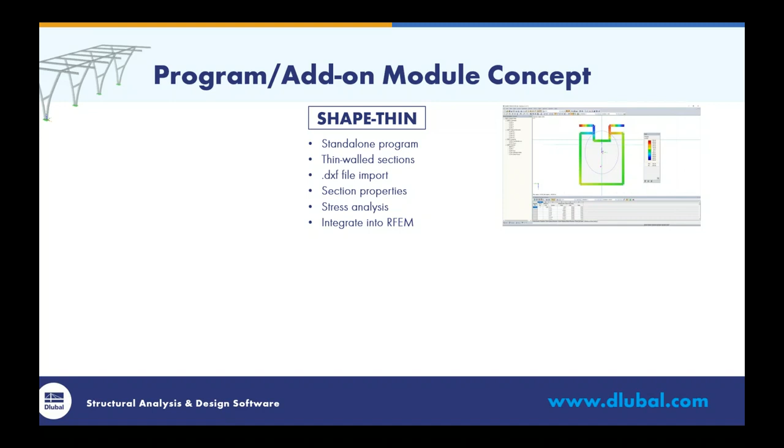Or we can import in a DXF file, which is what we'll be utilizing today. These section properties will be calculated. You also have the ability to run a basic stress analysis directly within the program, which we won't be taking advantage of today, but it is an opportunity to do so. Then we take these cross sections along with their properties and integrate them into our FEA program, RFEM.

So RFEM, again, is a separate program, and this is where we can model our structure entirely. We also can integrate with BIM software such as Revit, Tekla, AutoCAD. We can fully load the structure. We can set up our load combinations, again, according to the ASCE 7, as well as many other international standards, and eventually we get a full analysis.

Now, the analysis will provide us with design internal forces, deflections, support reactions, and we can take this analysis information into our own tools to do the design. If we'd like to do design within RFEM, this is where we'd want to take advantage of the design add-on modules. In particular, today we'll be looking at RF-ALUMINIUM ADM.

So this is nothing more than just a dialog box that is within RFEM that allows us to do member design for aluminum per the ADM 2010, the 2015, and we have both ASD and LRFD. This does include both ultimate and serviceability design, so we can check deflections as well. This also includes custom extruded sections, which we'll see today, where we take this section from Shape Thin into RFEM and we can design it per the ADM.

Now, this is for unwelded member design. Hopefully, at some point in the future, we hope to add the welded checks, but for now, keep in mind that it is only for unwelded members.

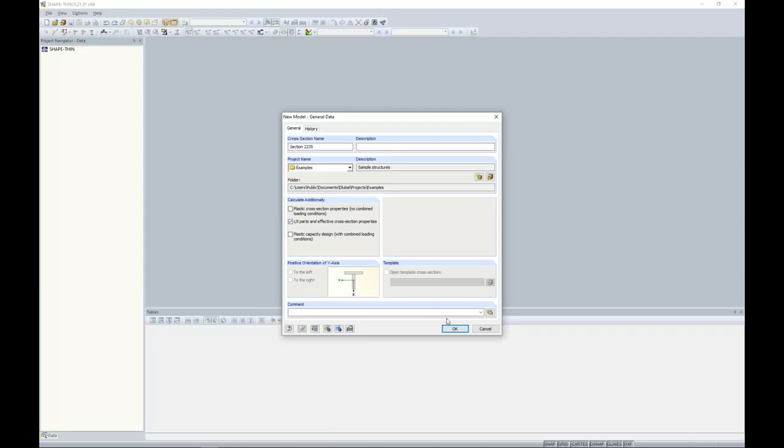Now this is the width to thickness ratios of our different elements that comprise this cross-section. This includes flanges, webs, any of the lips or extruded sections. Why this is so incredibly powerful is that when we take this information of these width to thickness ratios into RFEM and eventually into the aluminum design module, we can actually check all of them for local buckling. This is not something that maybe some other programs can do, but it requires a little bit more additional work within ShapeThin itself to define this section, and we'll go ahead and see that now.

So when I click import, we are brought into our graphical view here where we can go ahead and place the DXF background layer. There are a few options here for how we exactly want to place this DXF file, and I'm going to choose this one where I can further edit it. I select this center node, snap here to my origin point, right click to exit out of this dialog box, and now you can see this background layer here.

Now it's not so simple that we can just simply mesh based on this import here to calculate the cross-section properties. We somewhat need to trace over this background layer again, to determine the width to thickness ratios for eventually local buckling. But we do have some powerful tools that allow us to actually do that fairly easily.

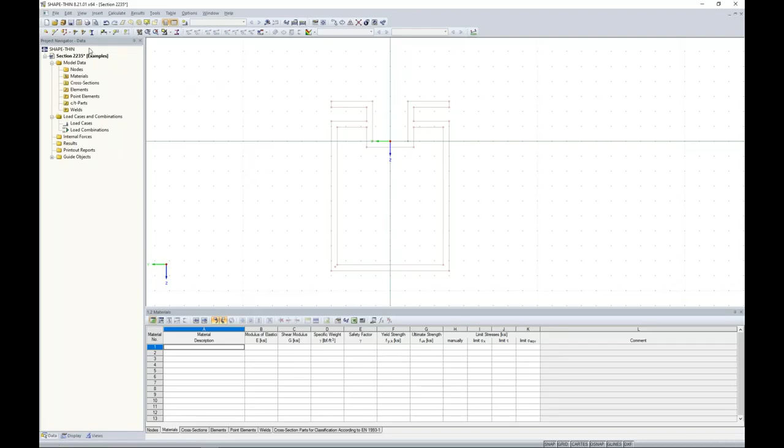So under edit, we have set elements with DXF template. The first option here is to set the center lines. I zoom in and select two lines, and you'll notice that the program automatically places a center line between the two selection lines. I'm going to focus for the most part on the left side of the structure here, because once I define my elements on the left side, I can mirror it to the right side.

So in addition to setting the center lines, we have this fourth option here to set the elements. We can manually draw in our elements with a new line, but we want to take advantage of these tools that just make our life a little bit easier within ShapeThin.

So I want to set my material right now. I can open up my material database, and you'll see over on the left we have our filters. We can filter to metal, to aluminum, to the ASTM, and eventually the ADM 2015. We have quite the long list here of all the aluminum materials directly from the standard. If I want to search by a particular material, for example, I can type in 6061 and see all of the applicable materials here, where I will choose 6061 T6 for pipes and tubes.

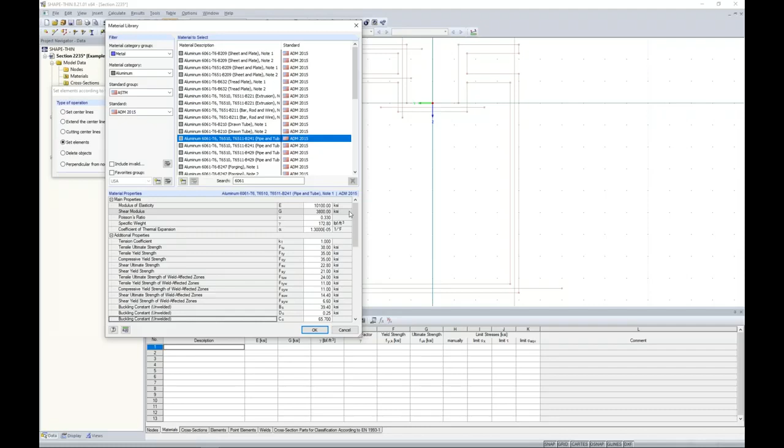All of my material properties are defined here. Quite honestly, the material definition is not so important within ShapeThin if you're not doing a general stress analysis, which we're not today. Eventually, once we get into RFEM, we're actually going to have to redefine the material anyway, but this is just a good introduction of where you can find the materials within the database.

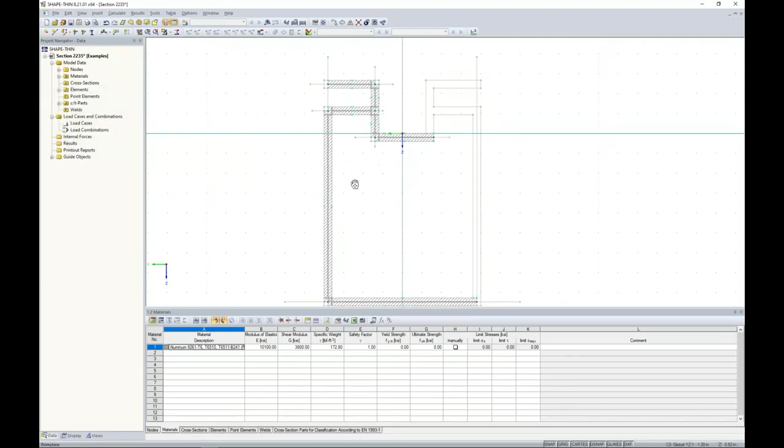So now what I can do is just simply click on these center lines, and the program detects where the outside boundary lines are for the thickness of these elements. Once I have completed, for the most part, the left side of the structure, you'll notice I want to actually drag this one element to the end. No problem, I can just drag and drop it, and it will snap right to that end point.

I can highlight all of my elements here and use my mirror tool. The mirror tool is exactly like what we would find in AutoCAD, for example, where we can create a copy. We can mirror about the global z-axis and the origin point. I click OK, and now the program has created all of the elements on the right-hand side. It does create a couple little small segments here that I can just simply delete with my keyboard.

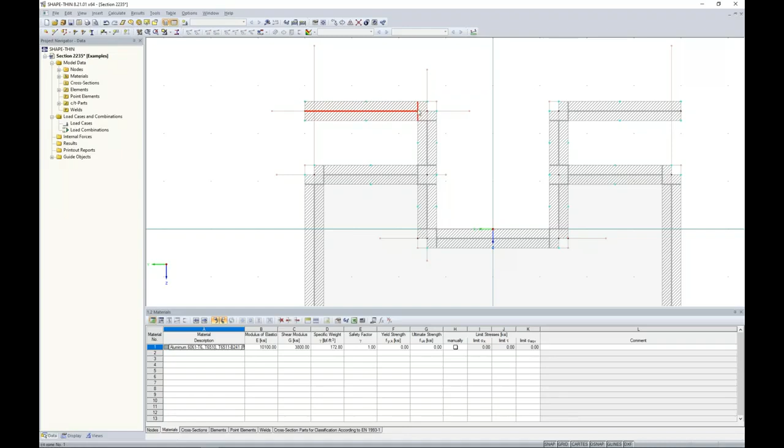Now you'll see these symbols at each element, and this is the width to thickness symbols, those C over T parts. So this is what's recognizing width to thickness, but even more so, you'll notice that at these closed ends we have what's called, looks like a T symbol, but at the open ends we don't have that same symbol. This again is important for aluminum design to tell the program how the edges are supported. Over on the right hand side we can see that it's supported, but over on the left hand side it's not supported. Again, important for local buckling.

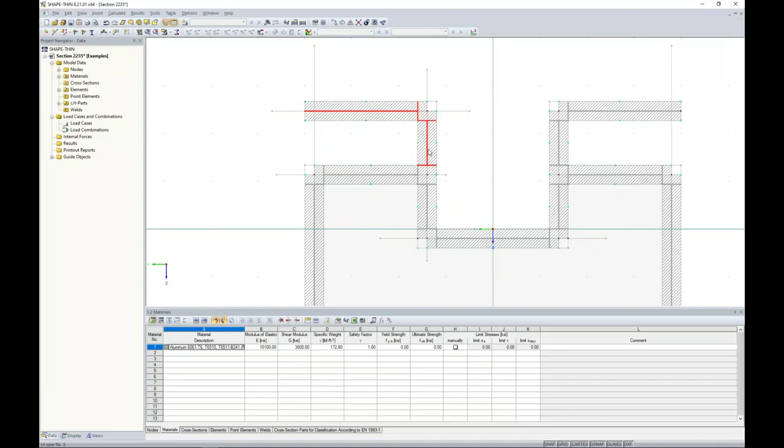When we look at one of these other elements that's supported on both sides, we see that T-type symbol on both sides.

So that's all we need to do, and now we're ready to run our calculation to determine the cross-section properties. When I go to run the calculation, I immediately get an error saying material number 1 Fy is not positive.

This is the yield strength for my aluminum, and I can look down here to my table where the program jumps to Fy, which is set to 0. The reason for that is aluminum has different yield strengths depending on tension, compression, or shear. So all we need to do is set some type of placeholder here, Fy equal to 30 is perfectly fine. That's why the program populated 0 there.

So we can rerun our calculation, and now we're presented with our results. Most importantly, if we look at table 4.1 for section properties, the program has automatically calculated all of the cross-section properties for us, including area, moment of inertia, warping, and things like that. So everything has been done automatically according to my calculation.

Now it's very important that I save these results. You have to save the results with the cross-section properties, because in order to integrate in RFEM we need to know those, and that only occurs with the saved results. We'll get a message in RFEM if you try to integrate a shape thin section without running a calculation first. So that's all that's required from the shape thin side.

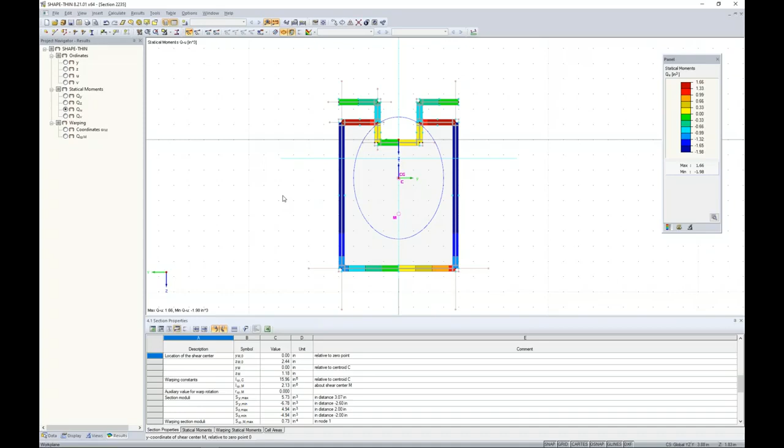So now what we can do is jump to RFEM. You'll notice RFEM has a very similar interface to shape thin. So what's great is that if you know RFEM pretty well, then shape thin should come pretty naturally.

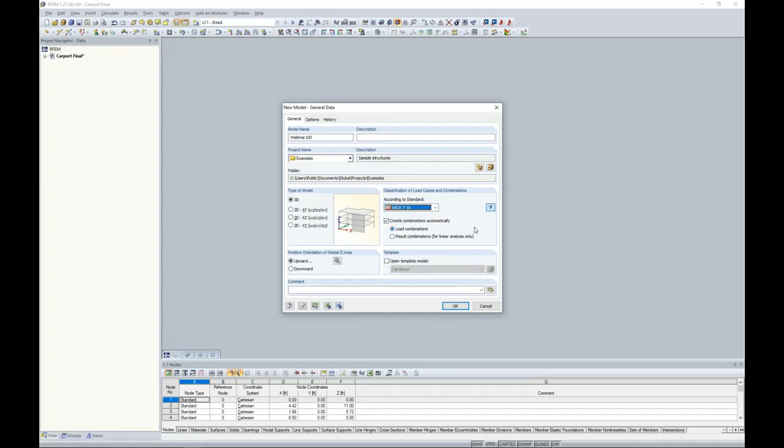We want to give this one a name, so we'll call this Webinar 100. The type of model is 3D. We can generate the load combinations automatically according to ASCE 7 2016. In this drop-down box you can see we have many other international standards as well, including the NBC 2015. You can always uncheck this checkbox, which allows us to manually create the load combinations instead, but today we want to take advantage of the load combination generator, so we click OK and we're brought into our main program RFEM.

So to give a quick overview for those of you not familiar with RFEM, we have our graphic window right here in the center, and we'll begin to model our structure and see that built up visually. Down at the bottom is our table, and we can always import and export data to and from Microsoft Excel, including our results that will eventually be presented in table format. Over on the left is our project navigator. As we generate this model, all of my input data, including my loads, load cases, and combinations, will be available within the project navigator so I can make quick changes to entire cross sections or material groups.

If we scroll down a bit further, this is our long list of add-on modules. This again is why we have the concept of only pay for what you use, because quite likely you won't utilize most of these add-on modules depending on the materials or international standards you use for your projects. And finally we have our tools up at the top, which we'll be utilizing today.

That brings us to the creation of our first column, where we'll go up to our quick tool to draw a new member. When we choose this option, we want to select the member type beam, and we can open up our cross-section library. For aluminum sections we'll typically work with the parametric thin-walled sections, or we can take advantage of the ADM sections directly from the standard itself.

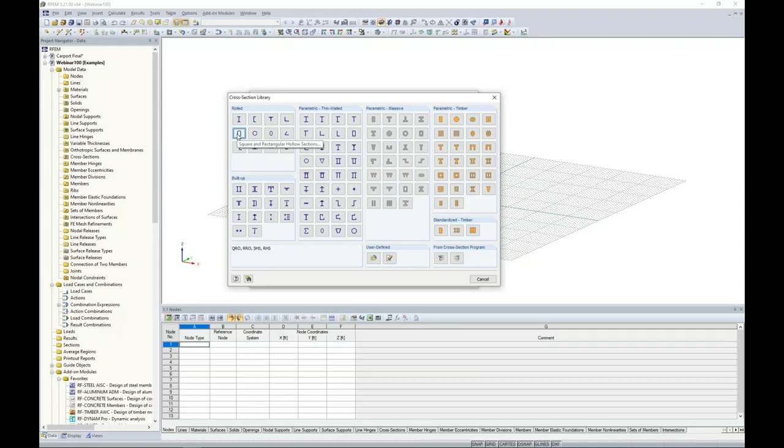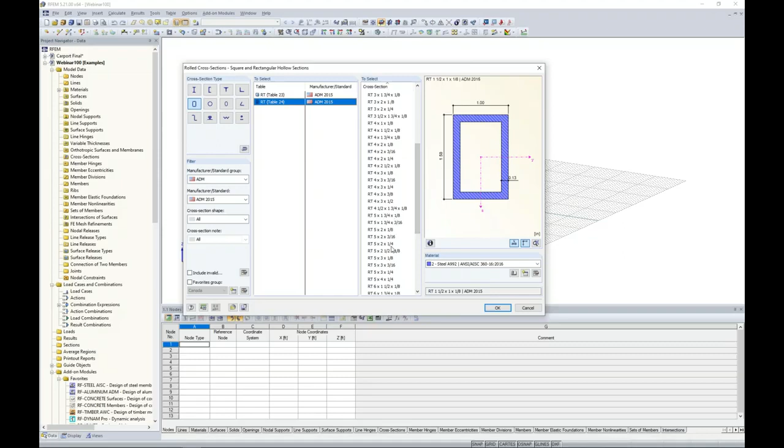So with that, we'll choose a hollow square section for today. I click on my HSS sections, filter over here to the ADM, and we'll see an additional filter to the ADM 2015. For my first column, I want to select a 5 by 2 by 1/4, and I can just choose it right here in my drop-down box.

Now the material by default when we first open up the program is 4,000 psi concrete or steel A992. So what we need to do is choose a new aluminum material from our database.

Well, that's quite easy by launching our material database, and this should look very familiar—it's almost exactly like what we saw within Shape Thin. We can use our filters on the left to filter to metal, aluminum, ASTM, and 2015. I can type in 6061 and select 6061 T6 from my list here for pipes and tubes. All of my material properties are presented in this table. I click OK, I click OK.

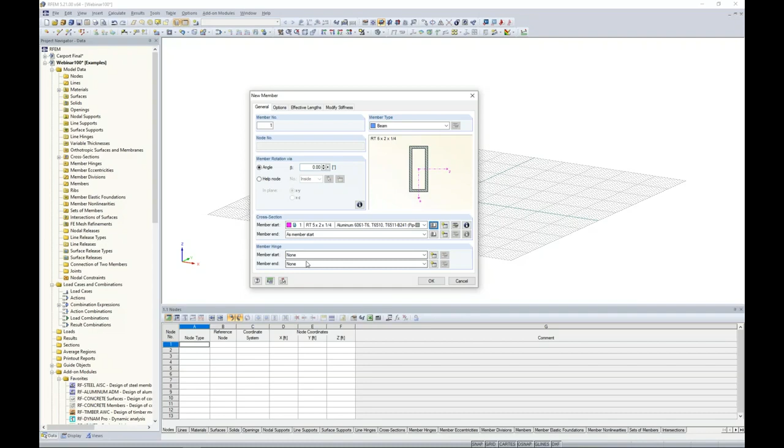Just to preface this, our model today will be fully fixed, but if you did want to set a pinned member end, you would do so within the same dialog box by creating a new member hinge. Leaving everything fully fixed is what the type none means, so we'll go with that for now.

So we want to begin by drawing our column, but I want to change around my drawing grid here to the vertical direction. I can do so by changing my work plane into the XZ plane.

I can scroll down, and instead of a straight line, I actually want to create a curved column, and I can do so by selecting an arc here. So I snap to the origin at 0, 0, 0, and then my second point can either be defined on my work plane, but in my particular case I don't have exactly 1 foot increments for my second point, which is the default for my drawing grid. So what I can do is just type in the coordinate points directly at 4.42, 0, and 11.

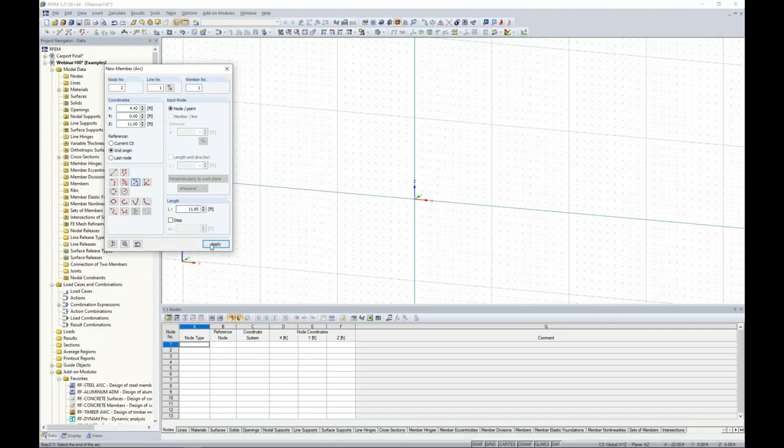Now you want to make sure not to drag your mouse outside this dialog box because everything resets to the current position of your mouse on the work plane. So we'll retype that in at 4.42, 0, and 11. We scroll down here to apply. Now you can either define the radius by clicking on the work plane, or I can just type in 30 feet on my keyboard and hit enter. And so now we should see the curved aluminum column shown here.

In a similar sense, we want to go back and draw a new member. I want to take advantage of the exact same cross section and the same material. I click OK, and we want to create another curved member.

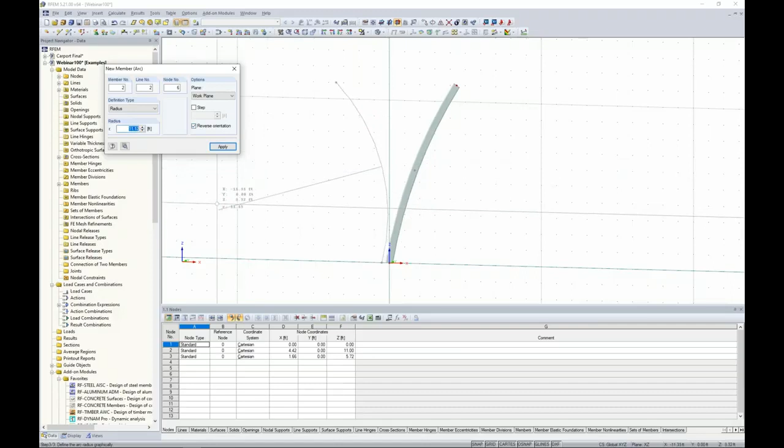So we'll choose the arc option. Now my first point doesn't fall at these 1 foot increments, so I can specify negative 0.5, 0, and 0. I click apply. Now my second point is going to be negative 3.5, 0, and 11, and I hit apply. Now you'll notice my radius is curving the wrong way—that's no problem, all I need to do is check the checkbox for reverse orientation. I'll type in 40 feet on my keyboard and hit enter. And so now we have our second curved aluminum column here.

The next thing to do is apply some type of intermediate brace between these two columns, and I want to do so at some nodes along the member length that I need to create. So I can right click on my right column and divide the member by a certain distance.

With this distance, I have the opportunity to choose the projected direction Z. So what I want to do is add a node that is 5.5 feet in the vertical direction starting at the base of the column. You can see here which side is the member start and the member end based on this black arrow. I type in 5.5 feet for my member start. I click OK, and now I have divided this member, which has created an intermediate node there.

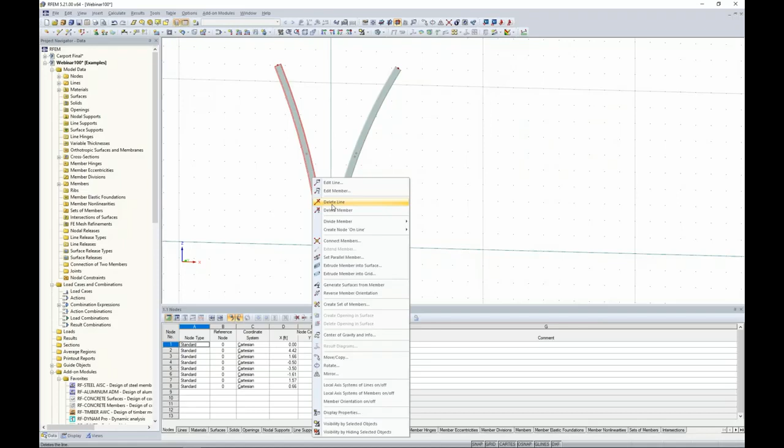I'm going to do the same thing with the left column. I'm going to right click and divide the member by a certain distance. Again we're going to choose the projected direction, but this time it's going to be 4 feet from the member end. You'll notice we have the reverse orientation for this column, which is no problem at all. So now we have split apart this member as well.

I want to go back to drawing a new single member, once again taking advantage of the exact same cross section and the same material. I click OK, but this time instead of the member being a curved element, it will be straight, where I can snap to those new nodes I just created to add a small intermediate brace here.

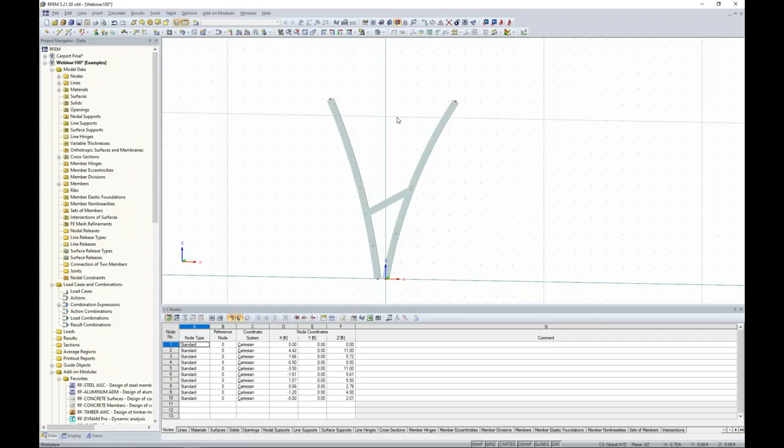Moving on to the top of our carport canopy structure, we want to import that SHAPE-THIN section. So I'll go to draw a new member, which we are familiar with, and open up my cross-section database. You'll notice that once this populates over on the right-hand side in the lower corner, we can import the cross-section from SHAPE-THIN.

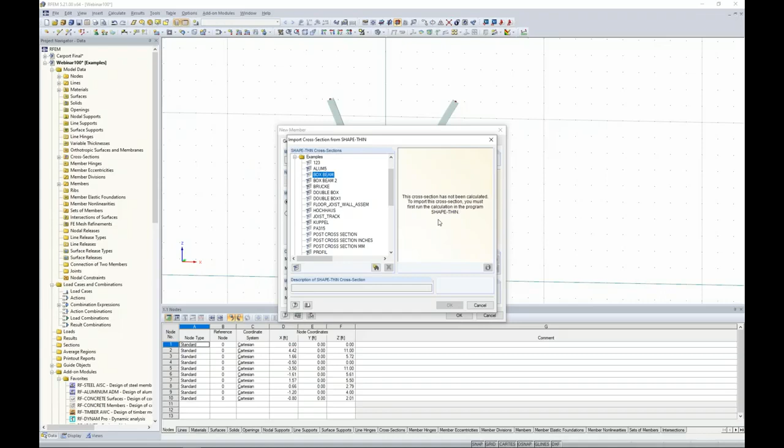We'll browse to the file location of where I saved my custom cross-section so we can see it here. By the way, if you were trying to import a cross-section where the results weren't saved, you'd see a warning or note like this, telling you the cross-section hasn't been calculated, and you'd need to go back to SHAPE-THIN and do so. This is why the results need to be saved with the SHAPE-THIN file.

We can see here section 2 that we have just created, and we want to import that in. Notice it defaulted to the first material, concrete 4000 PSI, available in our model. So we actually want to edit the cross section, and instead of concrete, choose the aluminum material already defined in the model. I choose aluminum 6061, and everything looks okay with the material and cross-section set now.

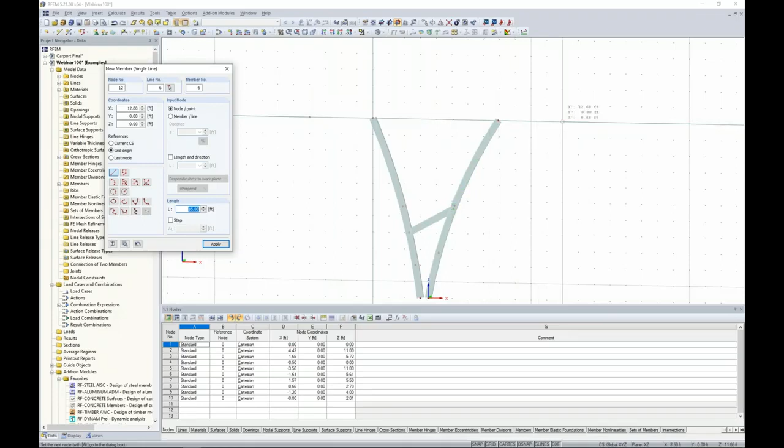I'd like to move my drawing grid so the origin is now placed at the top of the left column. I can do so by selecting this button to set the origin of the grid work plane, and move to the top of the left column. I'm still within the dialog box to draw my new member, so I'll choose a point about 4 feet from the top of the left column and span about 3 feet to the column on the right.

What's also powerful, if I turn off my drawing grid and zoom in, is that we bring in the exact rendered view of this custom cross section. So it's nice to see the orientation of the member and how it's framing into these columns we have just created.

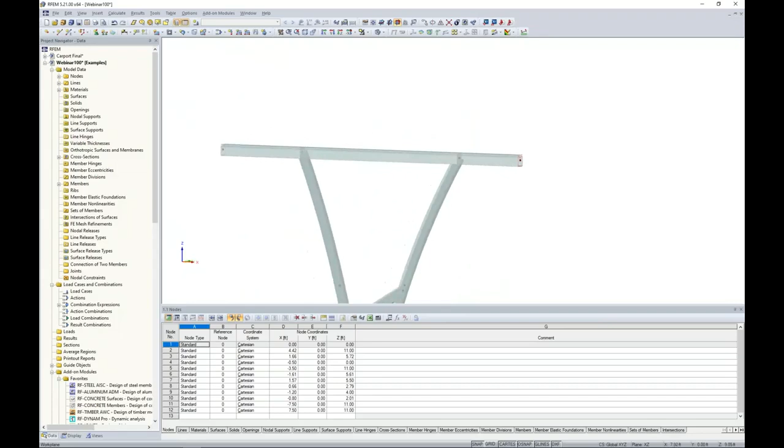Once we've created this main beam up top, I'll hold down my control key and select only my members, paying careful attention not to select the nodes. But there are a couple of nodes I do want to include, so by holding control, I'll select the node at the top of my right column and the rear node. There's a specific reason why I'm doing this.

I want to go to my Move Copy tool in my toolbar. Nothing too fancy about this - we want to make 6 copies in the global Y direction of 4.5 feet. Under the Edit Expanded Settings, we have the ability to create lines between copied nodes, which is why I was careful to only select a couple of nodes I was interested in. Even more so, we can assign a cross section to those lines.

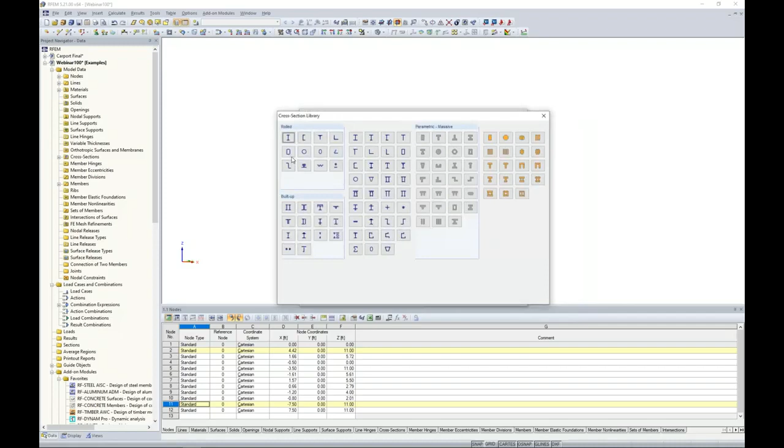We can create a new cross section type by going to a new member, which brings us to a familiar dialog box where we can launch our cross-section library once again, because I want to create a rectangular hollow section here. I choose this option, and over on the left we see our ADM filters once again, so I can scroll down to choose a 3 by 3 by 0.125. I select my material from this drop-down box - remember, it's already available to us because we've defined it within the model.

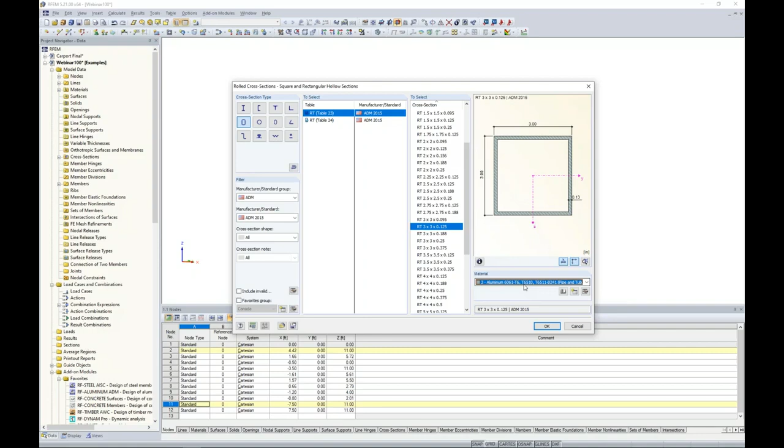I click OK, then OK again, and we're back in this Move Copy dialog box. I click OK once more, and you'll notice that not only did we make copies, but the program has placed these intermediate beams between our copied frames. This takes a step out of the equation where we don't have to manually draw these beams.

I want to take a few of these main frames, and holding down my control key and selecting them, I hit delete on my keyboard because they are not necessary. Now we are presented with, for the most part, a majority of our modeling done with the carport canopy structure. A couple things to add.

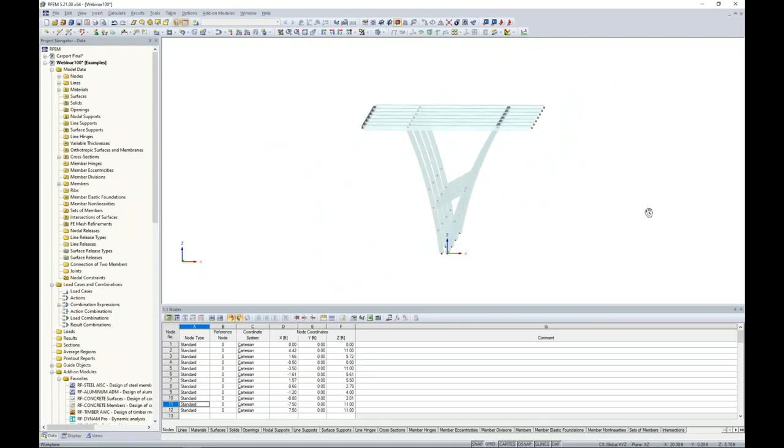Number one is that if I wanted to slope this roof at 5 degrees - normally sloping the roof might be a little difficult because we'd have to figure out at what elevation all of these nodes should be placed depending on their distance away from where the slope should begin. But we do, once again, have a nice feature within RFEM that allows us to do that automatically.

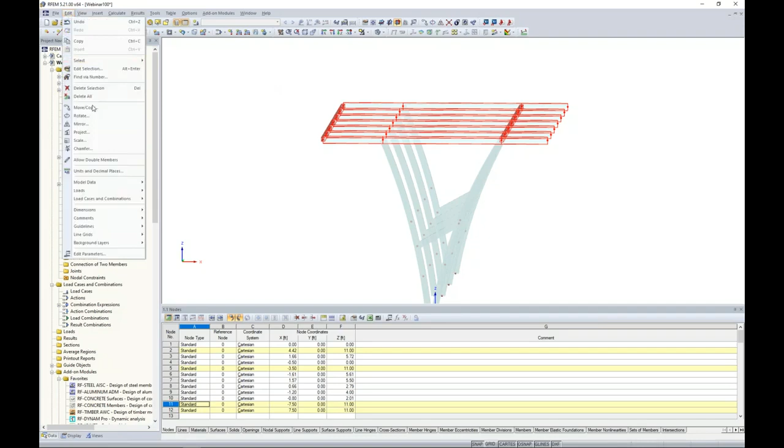So I select all of my roof members here, and under Edit, we have the chamfer tool. With the chamfer tool, we can define an angle of -5 degrees. We want to rotate it about the global y-axis, and we want to rotate it in the direction of z.

Then I can graphically pick the point where I'd like the rotation to begin, so I choose at the top of my right column any one of these points. The program populates the coordinates. I click OK, and now my roof has a 5 degree slope to it. Again, just a nice feature so that we don't have to manually determine what all these different elevations are based on a 5 degree slope.

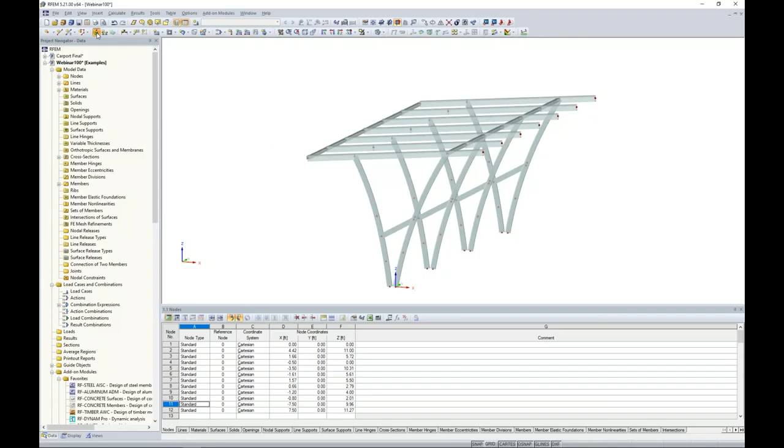The last and final thing to do with modeling of our structure is, of course, to support it. So we can go up here to a new nodal support. Now we have a few default options, including hinged and rigid, pin type support, or fully fixed. We can always create our own type of nodal support, which you'll see are 6 degrees of freedom here for rotation and translation.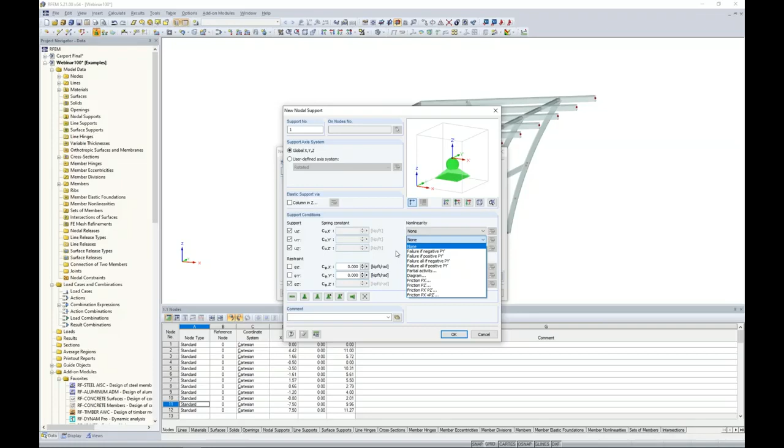If you have partial fixity for somewhere in between fully fixed and fully released, you can set that. Or because RFEM is a nonlinear analysis program, you can set these geometric nonlinearities so that perhaps the support fails in uplift, for example, or sliding or friction or anything of the sort with partial activity. For today, we want to choose the default fully rigid option. I click OK. All that I need to do is to highlight across the bottom of my structure, and now those fixed supports are applied to the bottom of those columns.

So we are essentially done with the modeling, and we want to move on to loading. What we need to start off with loading is, of course, defining our different load cases. We can do so within the option up here to define a new load case. This will bring up our load cases and combinations dialog box.

The first load case to create will be dead load. The action category is set to dead. Action categories are important because this tells the program exactly what load factors to apply to each load case based on the ASCE 7 or whatever standard you're using for the automatic load combination generation. The self-weight is automatically checked here for dead load, but when we create a new load case, and we'll call this one live load with the action category of live, we want self-weight to be unchecked because we don't want to account for it twice.

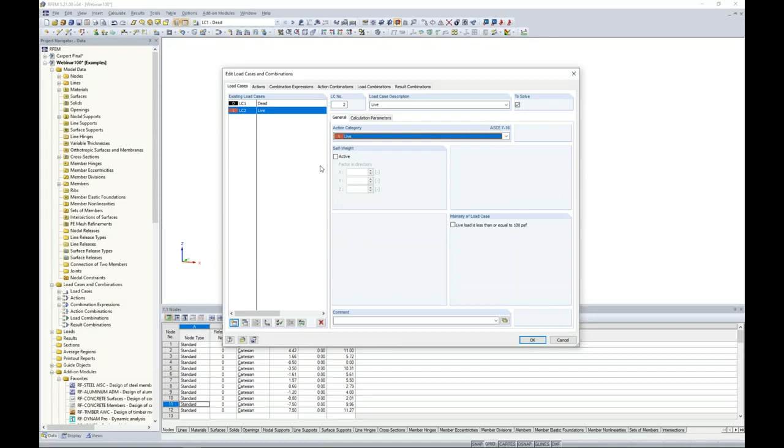Now, because this is a carport structure, maybe we want to consider the possibility of impact loads. Perhaps a car could unfortunately drive into one of these columns, and we want to account for that. So we'll create a couple of additional live load cases for impact. We'll call this one Impact 1, and the action category is set to live. We can make a copy of this load case and rename it to Impact 2.

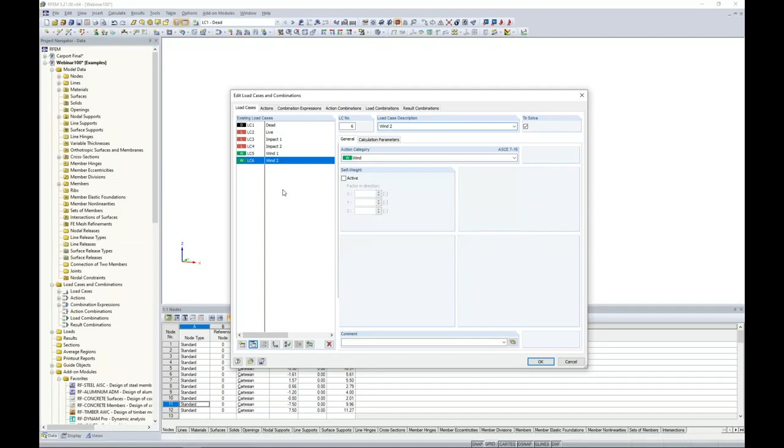I'm going to create a load case here for Wind 1 with the action category of Wind. Once again, I'll make a copy of this one and create a second load case for Wind 2. Now, of course, you'll probably have many more load cases for your project design, but for today's example, we will just stick with these.

So under the Actions tab, this is important because here are my actions that I've defined: dead, live, and wind. Under live, I have my live load, which will be some type of area load at the top of my roof structure. I want that to always be acting within these load combinations, but Impact 1 and Impact 2, I don't want everything to act simultaneously as we have it set here. Instead, I want Impact 1 to apply or Impact 2 to apply along with the first live load.

So how we can do that is by setting the option differently here. Live load can be set to no group, Impact 1 can be set to group 1, and so can Impact 2. So now the program will apply Impact 1 or Impact 2. Alternatively, it will not apply them at the same time.

It's a similar concept for wind load. Wind loads are automatically set to alternative by default, so it won't apply wind load 1 plus wind load 2. It will apply wind load 1 or wind load 2 within our load combinations.

The combination expressions—this is just the program letting me know that it will create LRFD load combinations as well as ASD load combinations. If we have any question about what those load combinations look like, we can click this little info button to see them listed directly from the standard.

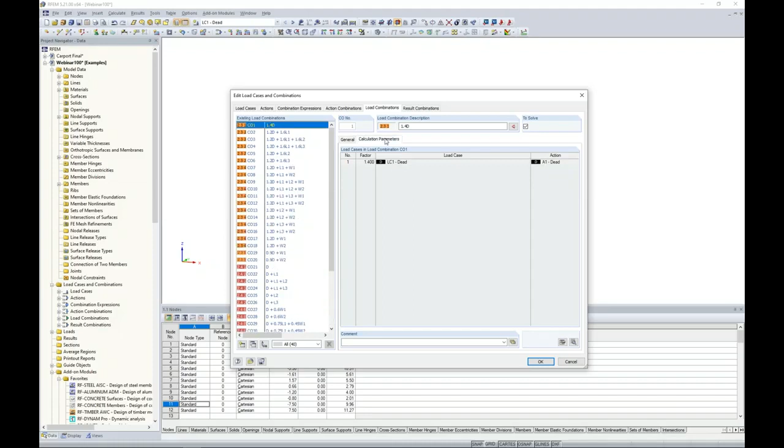Now, probably most important is the actual load combinations tab, because this shows all of my LRFD load combinations in orange and my ASD load combinations in red. The calculation parameters for load combinations by default is set to second order analysis, considering both big P delta and little p delta for all members.

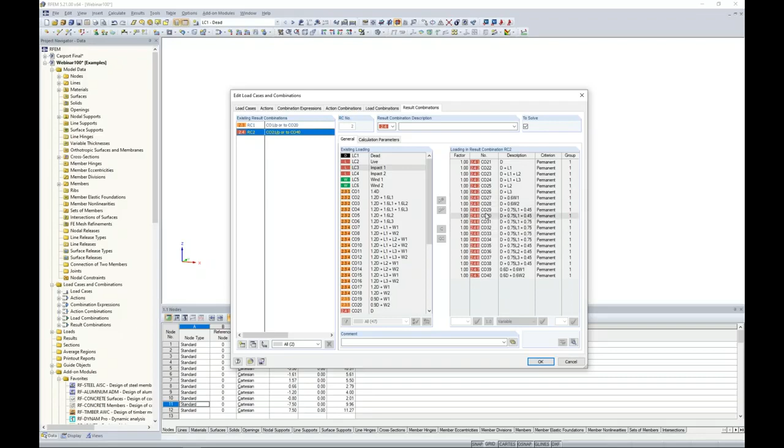The result combination is nothing more than an envelope solution. What the program does is create a result combination for all of my LRFD load combinations, and we have a result combination for my ASD load combinations. This allows us to graphically, or within our tables, see the max and min results within all of these load combinations combined—essentially just a result summary.

So once we are done defining our different load cases, we need to actually apply the loads to the structure. We're going to select dead load from my drop-down box, and I want to apply a downward area load to the top of my structure to account for, let's say, some PV panels that will be placed on top.

Under Tools, we can go to Generate Loads from Area Loads on Members via a Plane. Rather than manually defining all these different member loads based on their tributary area, we can let the program do that for us. So we choose the load direction in the global Z, the downward direction, and give it a magnitude of negative 0.02 kips per square foot.

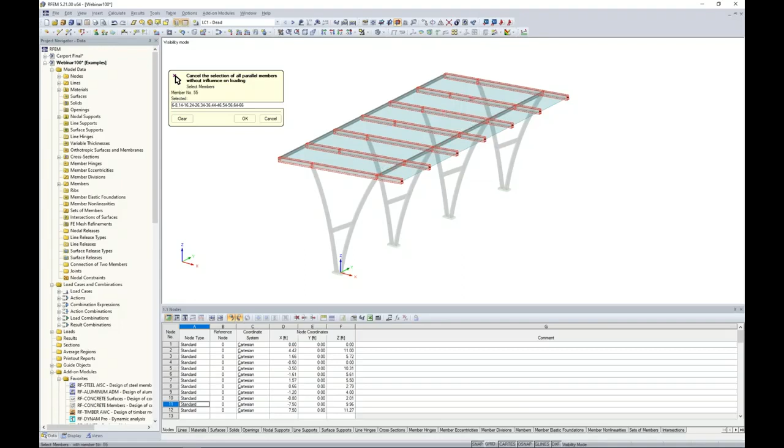I am going to select my corner nodes by graphically clicking on the 4 points. We also have the ability to exclude members parallel to a particular member. What I mean is I can select one of these intermediate beams framing in and out of the page—I select one, and you'll notice all the rest are unselected, since we don't want the load applied to those, but rather our main beams instead.

I click OK, and now you can see our area load generated. Even more importantly, if we right click and display separately, we can see the area load magnitude split up for each individual member based on its tributary width.

We now want to scroll to live load, and it's the exact same concept here. We'll go back to Tools, Generate Loads from Area Loads on Members via a Plane. What's nice is the program remembers all of my settings from the previous application, so all I need to do is change my magnitude to something slightly smaller. I click OK, and now for live load you can see the member loads applied based on their tributary area.

Now for impact load, this comes from ASCE 7-2016, specifically section 453 for vehicle barrier systems. The code tells us that for impact loads, we should consider a 6 kip load applied anywhere between 1 foot 6 inches to 2 feet 3 inches above the floor.

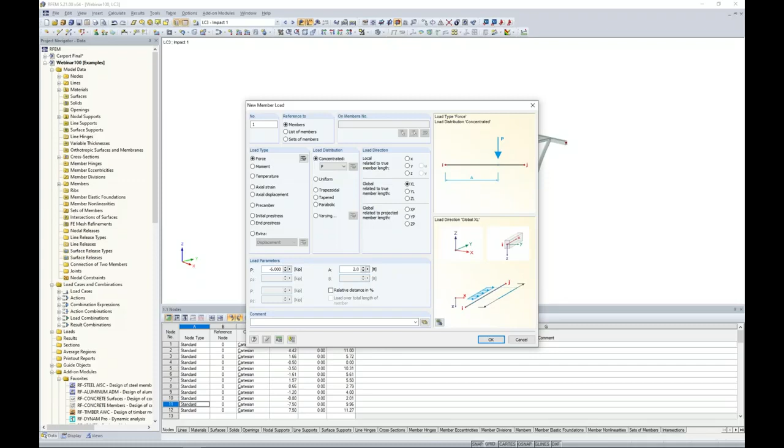For this application, I want to consider an impact load on my center columns. I'm going to go to a new member load, and instead of applying a uniform load, I can just change this to a concentrated load. With a concentrated load, we want to apply this in the global X direction, the lateral direction. We want to give it a magnitude of -6 kips, applied 2 feet from the member start. So I click OK.

Then I can just click on my column directly to apply that impact load. I scroll to the next load case, impact 2, and you'll notice my option to apply loads is still active, so I can easily click on my column for the next load case to apply my second impact load. I right click to exit, and now as we scroll through the two different impact loads, you can see why we wouldn't want these acting at the same time, but rather we wanted either one or the other.

Now, of course, maybe we'd want to add some impact loads to our exterior columns as well, but we'll just keep that for the simple application for today.

Now, for wind loads, we do have an automatic wind and snow load generator. The snow load generator would be efficient for this canopy type structure. The wind loads, unfortunately, cannot be used because we only have partially enclosed and enclosed structure options for our wind load generator, and typically canopies would be considered open structures. So we will need to manually apply our loads for today.

So what we want to do is go back to the area loads on members via plane in order to apply those loads.

Before I do, when manually taking a look at these calculations for our wind loads based on open structures, or maybe using spreadsheets, I just want to touch on a tool on our website. If you go to dlubal.com and under solutions, you'll see the GeoZone tool.

What we have done is integrate the maps for snow, wind, and seismic directly from the ASCE 7. You'll also see the NBC standard as well as many other international standards. This is also integrated with Google Maps technology.

So with our project, we can type in the location address, or click directly on the map. We're looking at wind for risk category 1 here, and we can see that the basic wind velocity is set at 105 miles per hour.

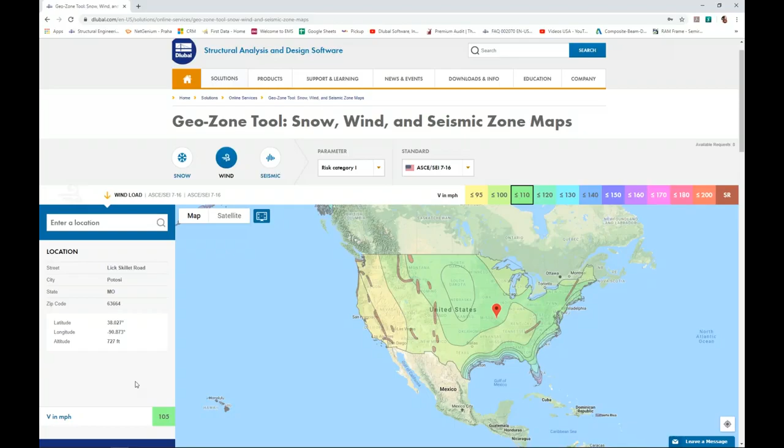So this is just something that's a little bit more efficient than opening up the code and flipping through all those different maps. You can take advantage of this. Keep in mind the first 10 or so clicks are on us, but if you plan to heavily utilize this tool, you may want to buy a package within our web shop.

Assuming we've taken this information and determined the magnitude for our structure today, we want to apply this in the lateral X direction. Applying this to my roof structure, we set the magnitude to negative 0.01 kips per square foot. The program remembers all my settings for my roof. Maybe I exclude the option to set members parallel to member, which removes the influence from it. I click OK, and now we should see this area load applied in the lateral direction to our structure.

In reality, we'd probably want to apply some lateral loads to our columns as well, but for simplicity, we'll just move on with this lateral application.

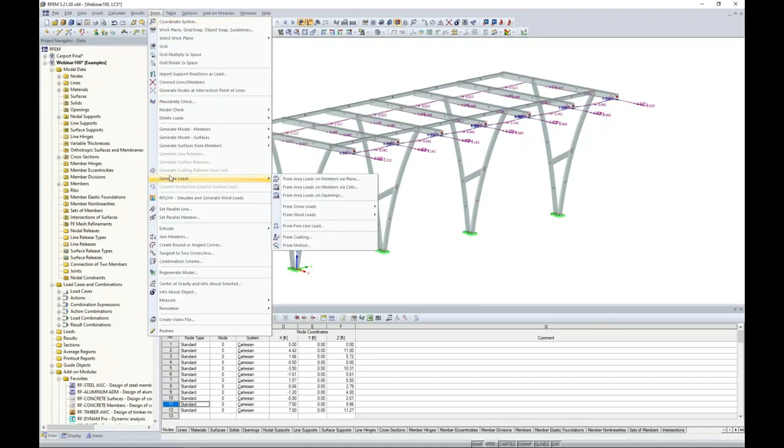Under tools, we also want to apply a downward load. For this, we can modify the load direction to the global Z direction, modify the magnitude to negative 0.005, and maybe exclude those intermediate beams here from my downward wind loads. I click OK. So all within this same wind load case 1, we can see a downward wind load along with the lateral load applied.

Now, a nice trick is that for wind load 2, I'd like to essentially keep the same load application, but just modify either the magnitude or the load direction. So instead of going back and applying our area loads with the load generator again, we go to load cases and combinations.

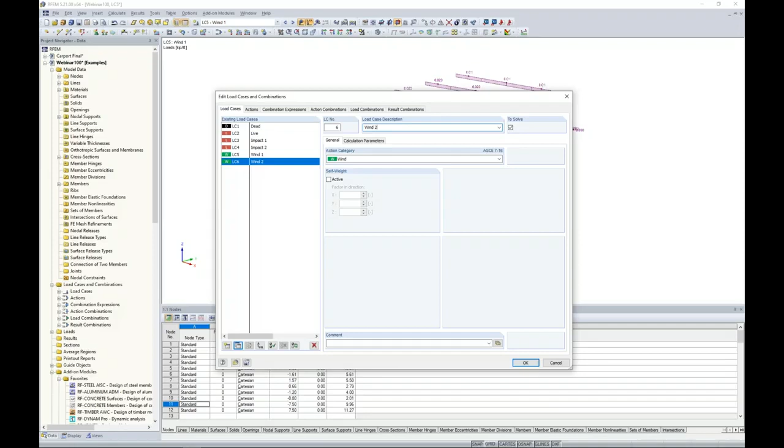I take wind 2 and completely delete it. Now when I take wind 1 and make a copy, renaming it to wind load 2, the benefit is that since I've already applied my loads to that load case, it will copy the loads along with the load case to wind load 2. So now when I click OK, I've copied all those loads from wind load 1, and I'm looking at wind 2.

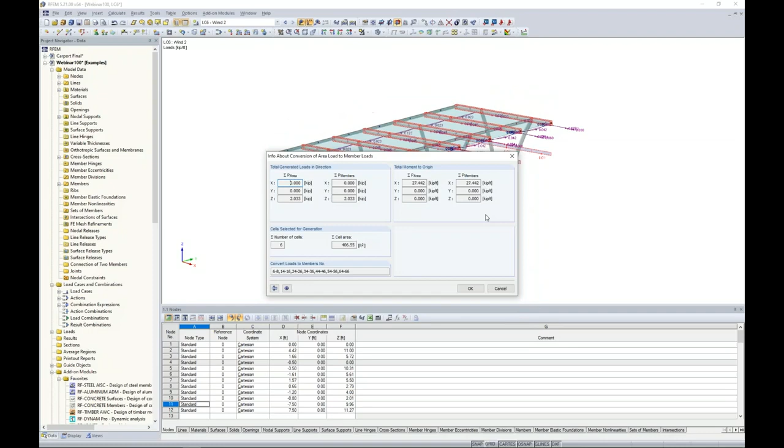All I need to do is double click on my top load here and reverse the orientation, reversing the magnitude for an uplift force instead. So that's just a nice way to quickly redefine loads by copying the actual load case itself.

Now that we've defined all of our different load cases, we can scroll through the different load combinations and see these applied to the structure at once, including live loads, impact loads, and wind loads. Everything is shown here.

Before we are ready to run our analysis, there's one thing I want to discuss from the ADM: the stability requirements according to section C2. I actually did a previous webinar around 2 years ago, but everything is still applicable to design today according to the ADM 2015. I went into much more detail about the stability requirements in Chapter C there, so refer to that on our YouTube channel or website. Just search ADM and that will bring up that previous webinar.

Today, what I do want to apply is the reduced stiffness requirements from section C2. The code tells us we need to reduce the flexural stiffness by a tau sub b factor. The tau sub b factor is an equation that needs to be iterated based on the axial forces within our member.

Additionally, there's a 0.8 factor that should be applied to bending and axial. And lucky for us, these requirements are almost identical to what the AISC requires.

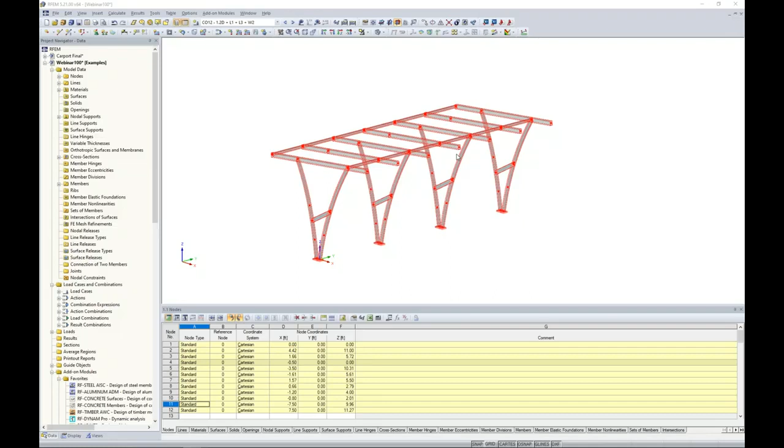What we have in the program: when we highlight all of our members, we can right-click to edit the member, and when this dialog box pops up, you'll see here a Modify Stiffness tab.

This allows us to modify the stiffness according to the AISC 360. Again, the ADM 2015 lines up exactly with the requirements from the AISC. We will determine what that tau sub b factor is, and we will also apply a 0.8 factor to the flexural and axial stiffness. So this will be applied to all members that contribute to the lateral stability. It's also a conservative approach to apply this to all members, including gravity members.

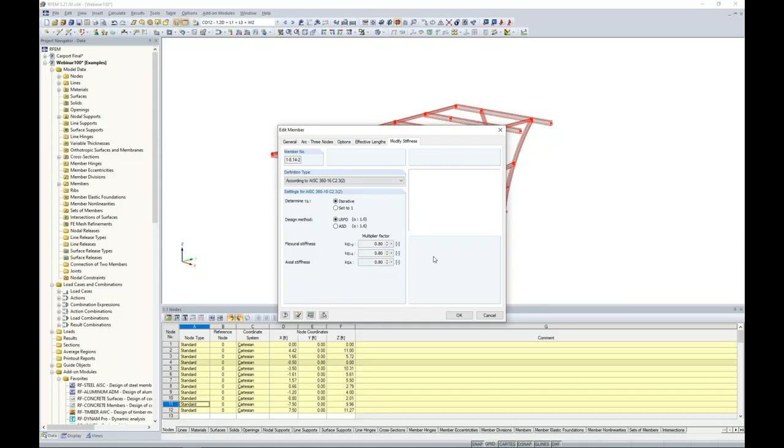So I click OK. You might be asking yourself, the stiffness reduction is great for my design combinations for the ultimate limit state, but for serviceability or deflection, I don't want to reduce that stiffness. So how do we separate that out?

We can do so directly within our load cases and load combinations tab. What I can do is select all of my ASD load combinations here by holding down my shift button. Under the calculation parameters, we have the ability to uncheck the members here for the stiffness factors.

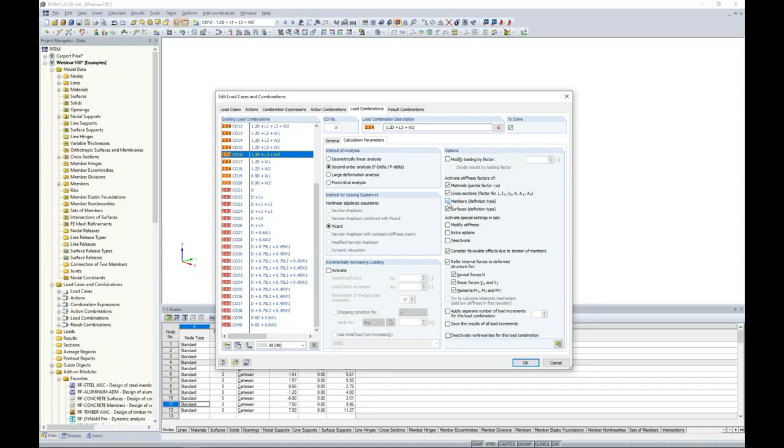This will no longer reduce the stiffness for all of my ASD load combinations, which are typically used for deflection. But if we take a look at some of our LRFD load combinations, sure enough, that checkbox is activated again, so we will reduce the stiffness based on the stability requirements within the ADM.

So now we are finally ready to run our calculation. We go to calculate all, and the program is actually going to cycle through about 40 or so load combinations, running a nonlinear analysis to account for secondary effects of P-delta and P-little-delta.

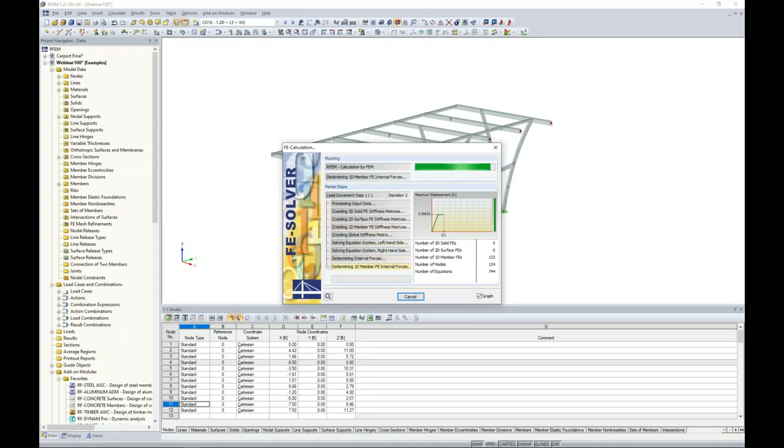Once this is done running, we will be presented with our results directly within RFEM, and we'll notice now that we have a results tab available to us. Currently we're looking at the deformations of our structure, which is a little difficult to see here because it's just based on the center line.

Under the display tab, this controls everything we're viewing graphically. We can turn on and off different elements, change the view, for example the results tree. We can expand out the deformations for members, change this to cross sections colored, and I can even smooth the color transition to make it look nicer.

Now I can scroll through to my different load combinations just to see the reaction of the structure under the different applied loads. And if we're interested in seeing how the structure behaves as a short video, we can play the animation here.

This is useful because if we incorrectly modeled something, we'd probably see some odd deflections here in this video. A nice feature is that we can export this out and save it to our computer as a video file as well.

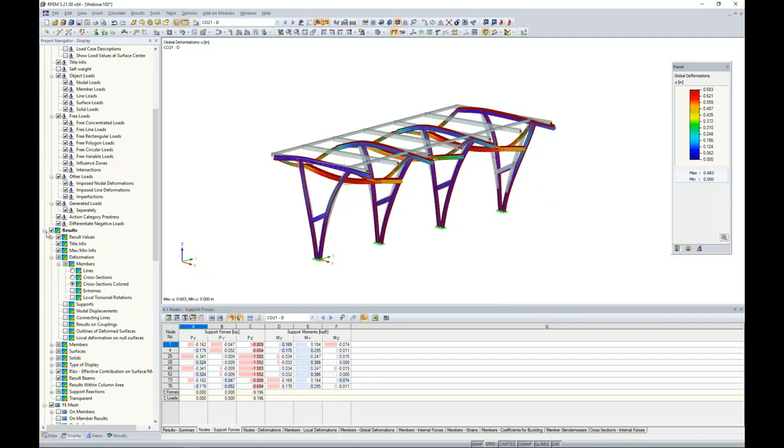In addition to deflections, we're also very interested in member internal forces. We can go back to our results tab and scroll in to view these members in closer detail, and we can take a look at axial forces, shear forces, bending moments. These are all available to me graphically.

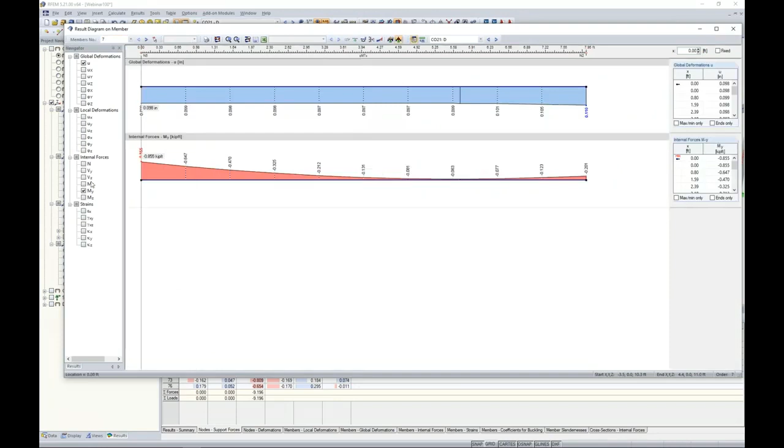I can also right-click on any one of these members to go to the results diagram. The results diagram will show me in a bit more detail, where I can turn on and off these internal forces and deflections, and see what's going on along the member length.

I can also scroll through to different load combinations here, and export them out to my printout report—maybe a little more detailed than what we can see graphically here.

In the same concept, we can also view our support reactions. We can turn those on graphically, and again all this information is available to us within our tables. We're currently looking at table 4.1 for support forces. You'll notice the table synced up with RFEM here, with the big red arrow showing me exactly where I'm at according to this table that I'm clicking in.

So we can export all of this information—support reactions, internal forces—again, to our own design tools, such as Microsoft Excel, or maybe some in-house tools to provide the design.

But if we want to take it a step further within RFEM, this is where we want to take advantage of our design add-on module, RF-ALUMINUM ADM. We can activate the add-on module within our project navigator on the left, or access the add-on modules under the drop-down at the top.

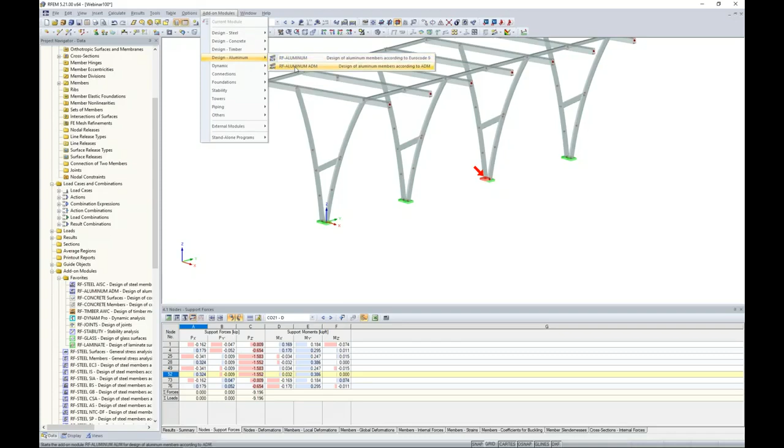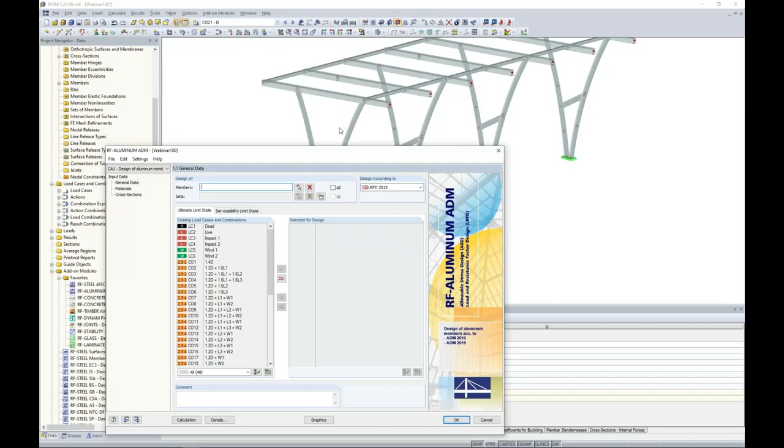This is nice because they are categorized a little bit nicer, where we can go to design of aluminum per the ADM. When I choose one of these add-on modules, notice it's just a dialog box that pops up within our main program. I don't have to worry about remodeling any of this information or redefining cross-sections, materials, load combinations. It's all brought in. What we're doing here is specifying information specific to the ADM module, including things like unbraced lengths or which load combinations we want to consider for design.

I'd like to start off with a fairly simple case here for introduction into this module. I'm going to rename my case here to secondary beams. I click OK, and I want to select the beams that I would like to design for this first case. I want to design these intermediate beams.

Now I can individually highlight these and select them, but a better option under the Views tab is to select my members by cross-section. I will choose the 3x3 cross-sections, and now you'll notice that everything is grayed out within the rest of my model. So now I can easily highlight the entire model with only selecting those 3x3 cross-sections.

We want to choose the LRFD 2015 for our design. For our ultimate limit state, this is where we choose our LRFD load combinations. Serviceability limit state would be our ASD load combinations, again brought in directly from RFEM, considering stiffness modifications and everything else that we've previously set.

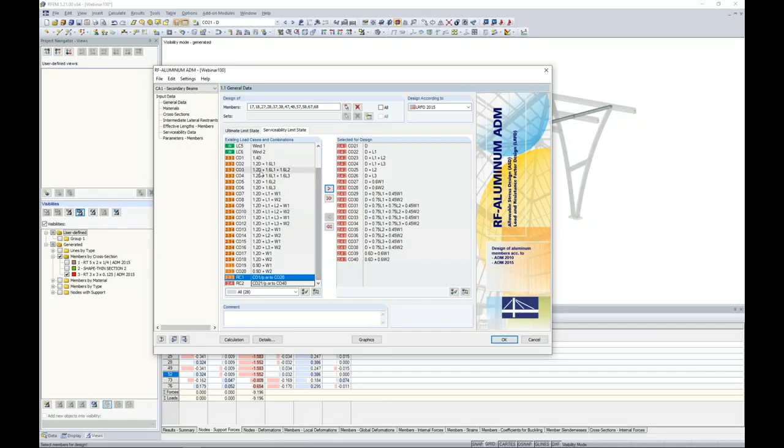All we need to do now is to simply move down our list over on the left. The materials are brought in from RFEM. We're still utilizing aluminum 6061. We have our cross sections here with our 3x3 with the cross section properties shown.

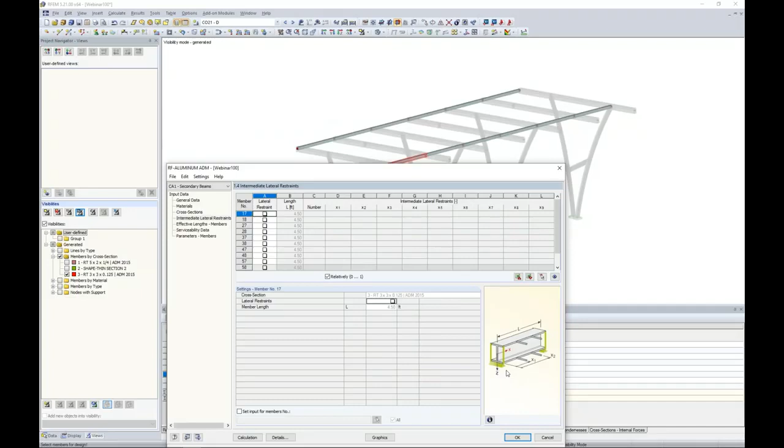Intermediate lateral restraints, if we had any top and bottom flange bracing. Now this isn't so applicable, for example, today with tube structures, but maybe you had some type of I-beam, then you would set the intermediate lateral restraints under this table here.

The effective length - so this is our stability design. We have strong axis buckling, weak axis buckling, lateral torsional buckling, and flexural torsional buckling. To explain a little bit about these options, you'll notice we have the effective length factors. Section C3 from the ADM tells us that we can use K equal to 1.0 unless a smaller value can of course be justified. So we'll go ahead and leave all of these values set to 1.0.

Now the effective length, which is our K times our unbraced length, is our next column here. By default, everything will go ahead and populate according to the member's length back in RFEM. In this case, they're all 4.5 feet. Same thing for unbraced length in the weak axis direction. So if by chance you didn't model in some members here, or maybe those PV panels are bracing these members laterally for both strong and weak axis direction, then you can go ahead and adjust the unbraced lengths here. But for today, we'll just keep all of those to default to the full member length.

Lateral torsional and flexural torsional buckling are very interesting because we have the ability, again, to set unbraced lengths here for LW, which would be the lateral torsional buckling length, or LT, which is the flexural torsional or torsional buckling length. So if those differ from the full member length, you can adjust those here.

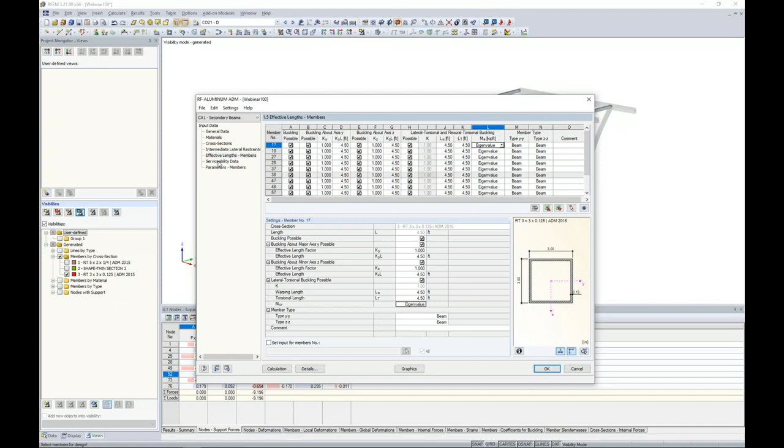Now, for serviceability data, this is where I select the member reference within my dropdown, and then I graphically select all of the members here that I'm interested in for serviceability design. So I've highlighted all of these members, same thing that we're doing for ultimate limit state design.

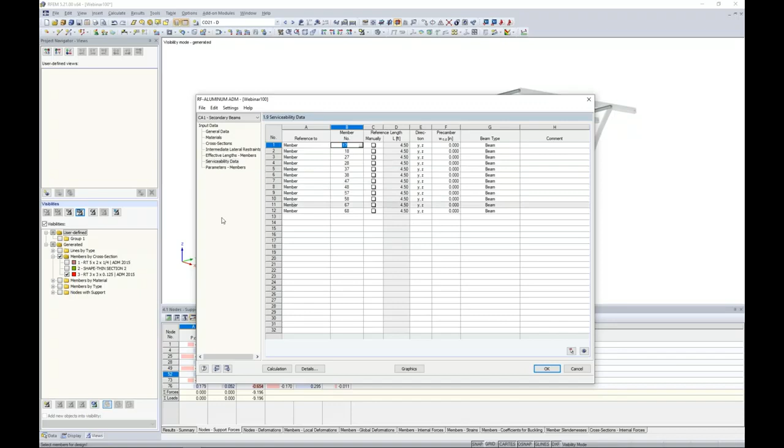Now, the reference length, once again, defaults to the full member length. We can put in here a pre-camber. We specify if it's a beam or a cantilever. I'll show you in just a minute exactly where we set the limiting deflection ratios to, because we need to have something to compare this to, the deflections that the members are experiencing from the analysis.

Under the parameters for members, this is actually for tensile strength according to chapter D. In section D3 2B, the code states that tension transmitted through some but not all of the cross section — if this is the case, then the effective net area, A sub E, needs to be calculated. A sub E depends on eccentricity of the connection, the length of the connection, so you can see all of this input data here. What we'll do within the program is automatically calculate your effective net cross-sectional area, A sub E, which is ultimately used for the tensile rupture capacity.

So if we do have that situation at either the member start or the member end, this is where we can reduce that area here.

Under the details tab, there are quite a few options throughout here that we just don't have time to go through today, but certainly the help file, which you can access with this little question mark down at the bottom, is useful for giving a little bit more information on all of these settings.

But under the serviceability tab, this is where we can set our limiting deflection ratio. So you can see L over 360 is set for beams, L over 180 is set for cantilevers, and you can override these limiting deflection ratios as you see fit for your design project.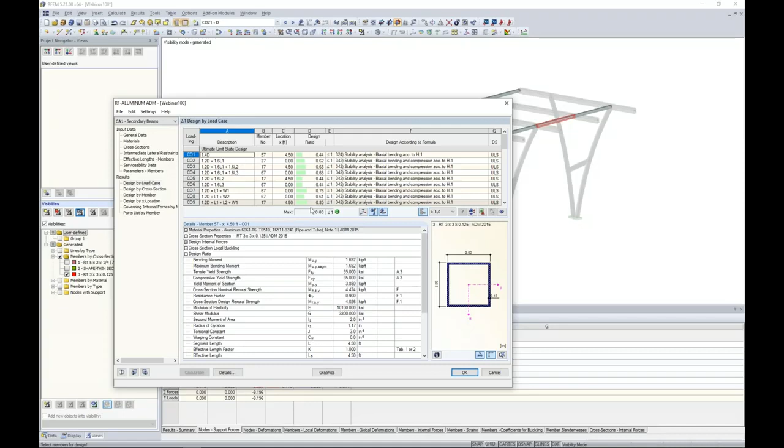So once we have defined all of this information, we hit calculation, and you'll actually see that the program solves this rather quickly because we already have all of our internal forces from RFEM. We're just bringing them into this add-on module, applying the ADM calculations, including the quick little eigenvalue analysis for stability, and then ultimately we're coming up with our results.

Now we can view design by member. Again, when I'm looking at these tables, you'll notice that everything is synced up in the background. So I can take a look at this particular check — this big red arrow is telling me where the controlling internal force is for the axial check, for example, and biaxial bending according to chapter H.

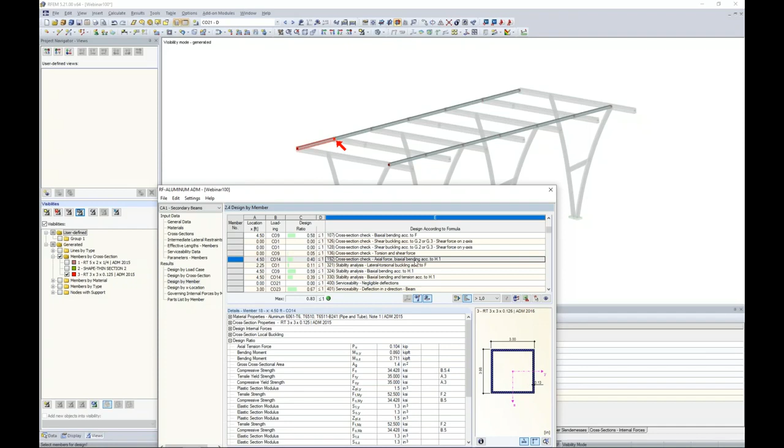What's also really powerful is that for each member, we're giving you the results for every check within the ADM. So you're going to see here shear checks, bending checks, biaxial bending, axial forces, and of course, lateral torsional buckling and stability checks for biaxial bending. The reason why we do this is because we don't really want to be a black box program, but we're trying to give you as much information as possible so that you can understand where the numbers have come from. In addition, you'll see all of the variables listed here along with the code references.

By all means, though, if we're not really interested in seeing all of this information, but we just want to know what is the controlling check for each member, we can easily use our filter option here to filter by max, and now we can see for each member exactly what's controlling.

So in many of these cases, stability is controlling, and I just want to point out that for any one of these stability checks, we actually can view a picture here, a graphic of our mode shape. So this is what's going on in the background when it's running this eigenvalue analysis to determine the critical buckling moment. Just a nice feature to see what's going on there.

Now, all of this information is available to us graphically, so we can click the graphics option. Now we're within the RF-ALUMINIUM ADM module, just viewing these code check results graphically back in RFEM. So I can take a look at my ultimate limit state design, or if I want to turn off ultimate and view my serviceability limit state design visually, I can see both of those there.

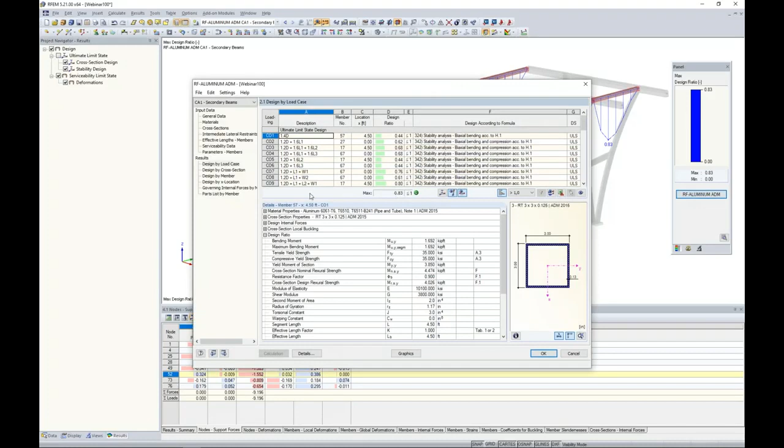We also can go back to the ADM module and view a parts list by member. Again, all this information can be exported directly to Microsoft Excel.

So that's just a quick introduction to the aluminum ADM module with a fairly simple example for these beams. The other quick example I want to show you is, of course, with our custom extruded sections that we brought in from ShapeThin, and how we can also design those within the module.

Now, notice that the program has broken apart these members here based on where they were framing into the columns. And actually, that's not a big deal at all.

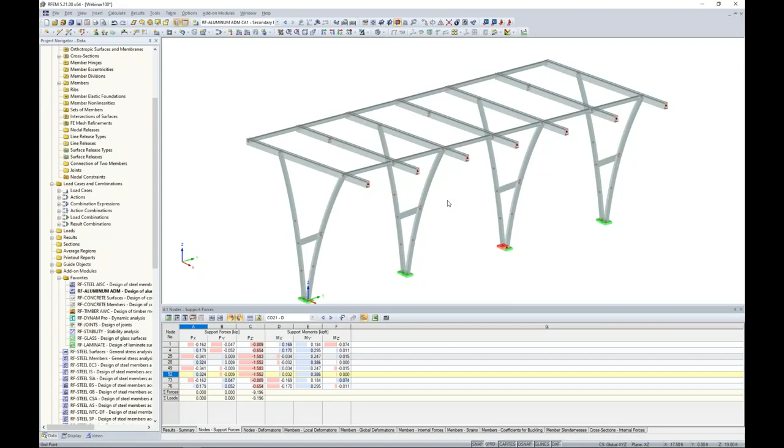So what we want to do here is, under the Views tab, I'm going to select all of my ShapeThin sections, and we'll turn off my 3x3 sections. I can highlight all of my members here.

I can right click, and under member we have the opportunity to create sets of members. So what the program does is it groups these individual members into what's called a set of members, which just places a very faint dotted line around these segments. So you'll notice that I didn't have to clear my results for the analysis. It does not affect the analysis whatsoever that these are broken apart into separate segments.

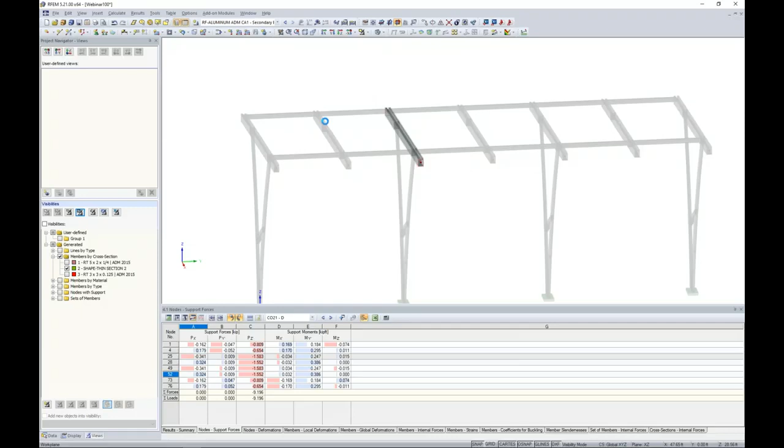But for design, maybe we are interested in designing this as one continuous member rather than individual segments, which, by the way, both are possible. But I just want to show you the benefits of designing a set of members quickly. So we'll start off by designing our set of member that I've shown highlighted here.

We go back to our RF-ALUMINIUM ADM module, and I'm going to go to File, New Case. For this one, I'm going to call this one Main Beam. I click OK. What the program gives me the ability to do is to always jump back to my secondary beam design. So I've just created a second case here within my dropdown.

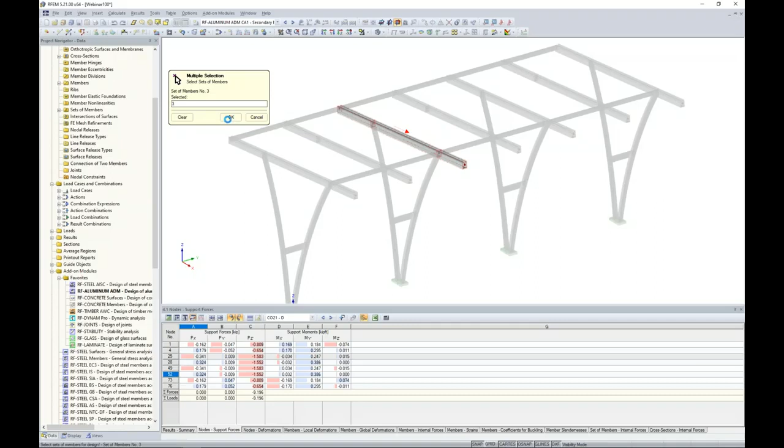This time, I want to design my set of members here. I click OK. Now, quite honestly, not much is different with sets of members until we get to some of these later tables. I want to select all of my LRFD load combinations according to the ADM 2015.

Now, I will skip over serviceability limit state design just for the sake of time. So we'll only take a look at the ultimate limit state design. And then we're just simply moving from top to bottom with our tables here with materials.

Notice the cross section for our ShapeThin custom extruded section is available here with all the cross section properties that we calculated way back when.

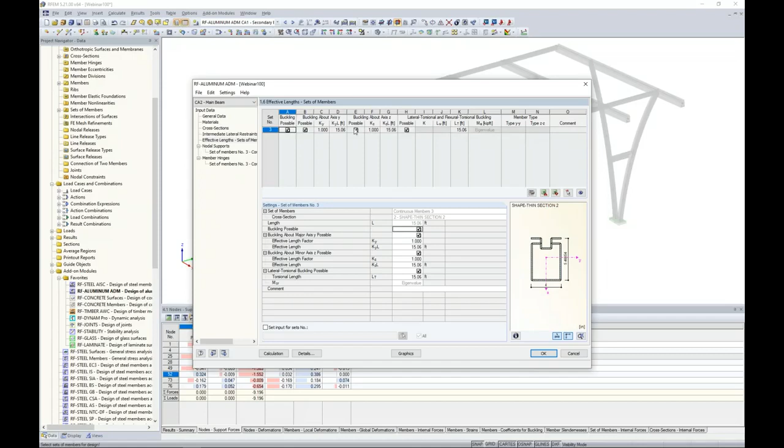The effective length. So this table looks slightly different than what we saw for members, and now is effective lengths for sets of members. And some things are grayed out here. And that's because everything is actually controlled under our next table for nodal supports.

So similar to members, for sets of members, we are running an eigenvalue analysis for stability once again in the background. But what's more powerful about sets of members is that we have a bit more control over how we are specifying how those 4 degrees of freedom where our supports occur are actually fixed or released.

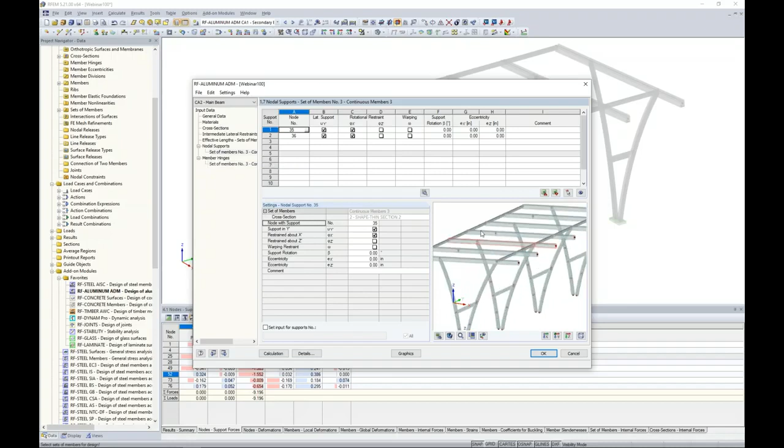So we can see here under nodal supports, which is a new table for sets of members, our individual set of members here. And I can isolate this to take a look at the set of members and where the program has automatically placed these supports.

Now, actually, this is not correct because I don't want to place a support on the right-hand side, but rather I need to move that back to where my lateral members are framing in as well as my column.

Well, that's no problem. All I need to do is just to graphically select my new node here, move it back to node 26. And actually, let's go ahead and try that again. I want node 26 and I also want node 35. There we go. So I've supported this individual set of members exactly where we have all these different members framing in.

Now, this is where I have my 4 degrees of freedom that I have the control to set now for sets of members. I think we can all agree that we do have lateral restraint because we have these transverse beams framing in at both of these support locations.

Rotational restraint is the ability for the member to rotate about its own axis, and I would also agree here that maybe we are restrained in that aspect as well. Now, rotation about the vertical axes - I would say that maybe for our front support here with our column framing in, we do have restraint about the vertical axes for rotation.

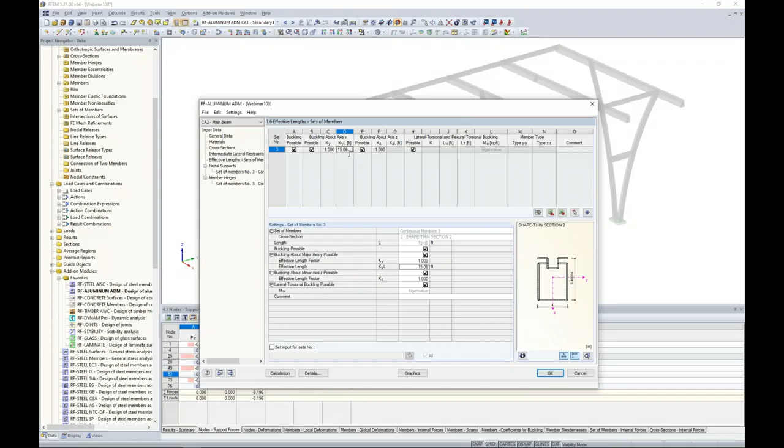You can design a continuous member that doesn't lie in a straight line, but is in the same plane. So for strong axis buckling though, we do need to adjust this, and the worst case distance here is between our 2 columns at 7.95 feet. So the last table here is member hinges. If we wanted to release any one of those 4 degrees of freedom along the set of members, we could do so here, but we don't have that for today's example.

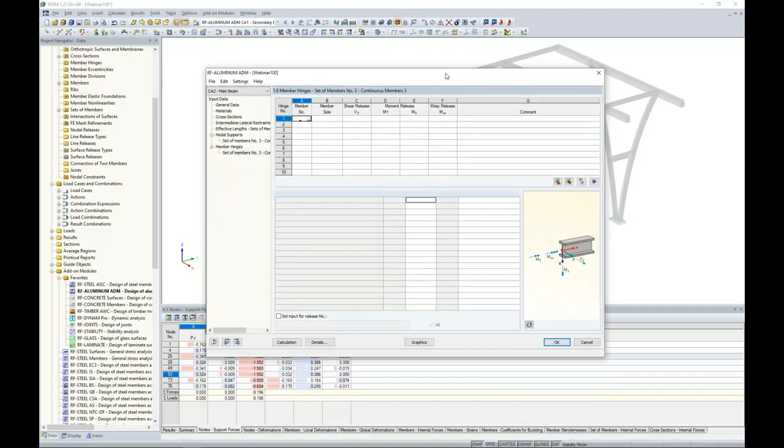So then I can just click calculate. Again, it solves within a quick second and we're presented with our results, and we can view design by sets of members. So same concept here. We're going to present to you all of the different checks directly within the standard. And I wanted to point out of course stability analysis for lateral torsional buckling. And we can view our mode shape here for this set of members and what the program's actually doing in the background.

One thing I mentioned over and over again is the ability to check local buckling for these custom extruded sections. So that work that we put in within Shape Thin for the element with the thickness ratios and whether it's closed or open on either end, well, you can see here that that's now all listed under the cross-section local buckling. So every single element is listed here. It shows whether it's in tension or compression, how it's classified, the slenderness. So again, very powerful because not a lot of other programs have the capability. Of course, we can bring it in, we can do general design, but the ability to do local buckling for all of these individual lips and webs and flanges is pretty powerful.

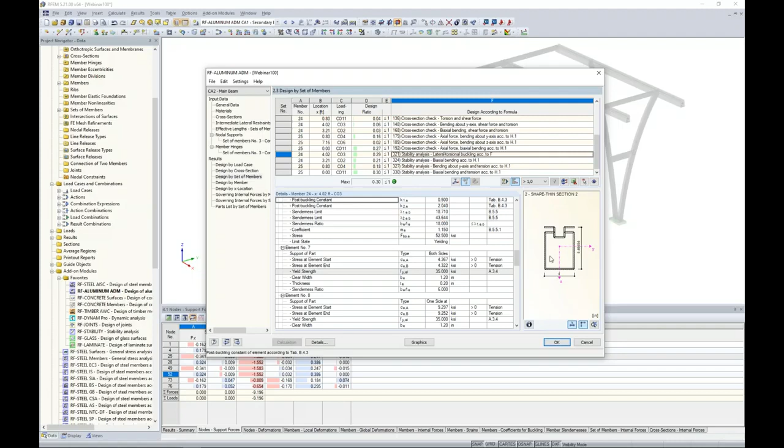Okay, so that's essentially what I wanted to quickly show you for design by sets of members, and that will actually bring us to the end of our webinar today.